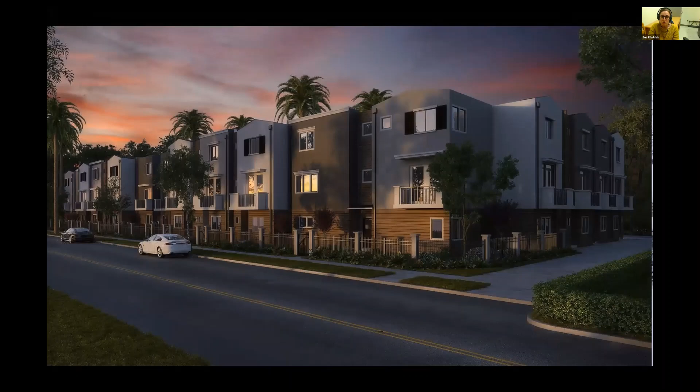So we also work on systems that provide safe forms of shelter. That could mean anything from a single family home to a multifamily residential unit, to things like high rises, office buildings, to educational facilities. It could mean universities, other school systems, even structures like stadiums. Places where we work on providing safe forms of shelter for where we live, where we work, where we play, and more.

We also work on systems that protect our coastlines and waterways. We are looking at our coastlines and trying to protect them from erosion. We're also trying to protect our natural waterways, so rivers, streams, lakes. And we also work on and create human-made waterway systems, like this canal system down in Indianapolis.

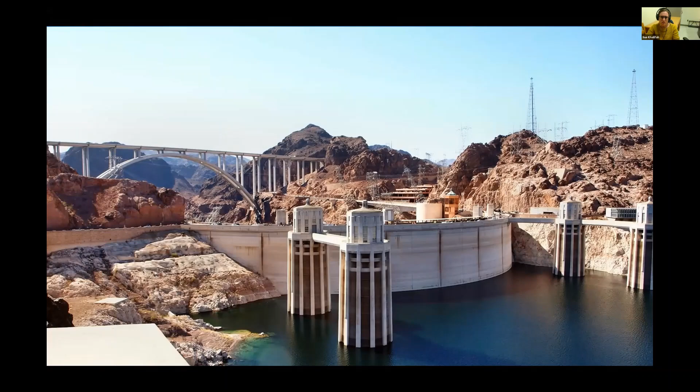And there's more. We also work on systems that supply cleaner forms of energy, things like solar farms, very common for civil engineers to work on, wind farms, hydroelectric plants, in addition to geothermal systems, using the ground as an insulator.

And we also work on systems, like Whitney was talking about, that provide clean water and sanitation. So when you turn on the faucet and clean water comes out, that's thanks to a civil engineer. And then that water goes down your drain and out, and it comes to a place where we take care of it and treat it.

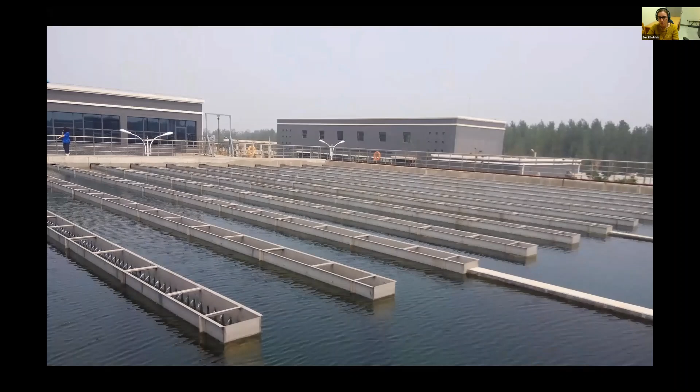So this is hopefully a high level view of some images that give you an idea of what we as civil engineers do. And now I'm going to transition into what civil engineering means at Purdue.

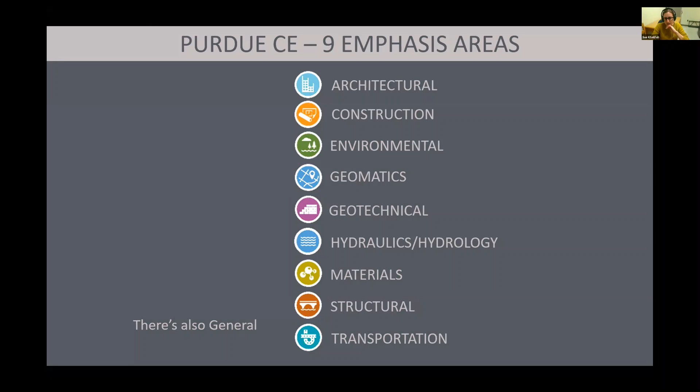We talked about civil being really broad and diverse, and you can see that here. In our program we have 9 emphasis areas, and we'll talk about all of those. But if you can't or choose not to decide on any one in particular, you can remain general, learning a bunch of different topics. So I'm going to now let everyone talk about the different emphasis areas here.

Jasmine, go ahead on architectural. Yeah, so the architectural emphasis focuses on energy efficient and sustainable built environments while optimizing human comfort. This deals with everything inside the building envelope, which includes the mechanical, HVAC, electrical, and lighting systems, as well as the indoor air quality and environment.

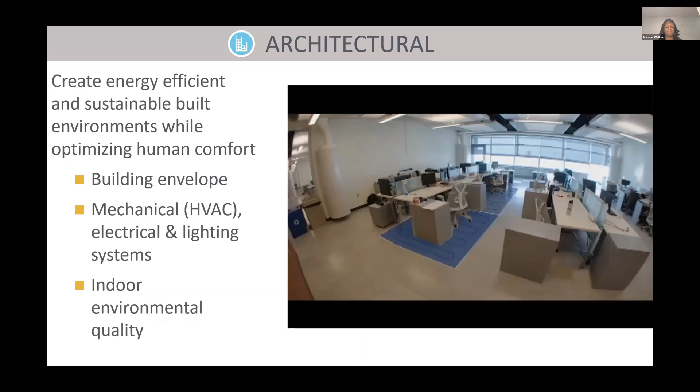Cal, tell us a little bit about construction. Yeah, so construction is a lot more about the implementation of the actual design. Pretty much you get your signed and sealed drawings at the end of the day, and then the age-old question is how we're going to build this, and how we're going to build it as effectively and cost efficiently as possible. The entire time, you've got to make sure you're following environmental standards, safety protocols, all that kind of stuff, and making sure you're not going completely over budget. So construction is kind of going from point A to point B, which is never really as easy as it seems. All the things here are things you'll be doing: ensuring quality, and all that kind of stuff.

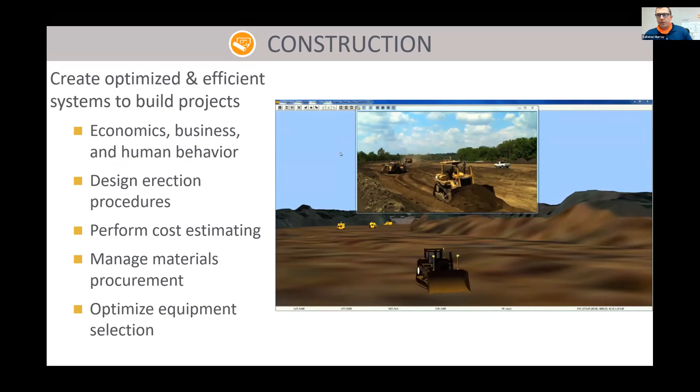Great, thanks Cal. Whitney, can you shed some light on what environmental means in civil engineering? So environmental for civils is kind of like the cross between what an environmental engineer would do if they were purely environmental and what a civil engineer would do. Basically, they're in charge of making sure designs meet the standards of whatever agency you're following, so in the United States that would be the EPA. Additionally, they're in charge of creating designs that better our environment in general or are sustainable, so they'll work with water, air, and soils to make sure everything is good for the environment.

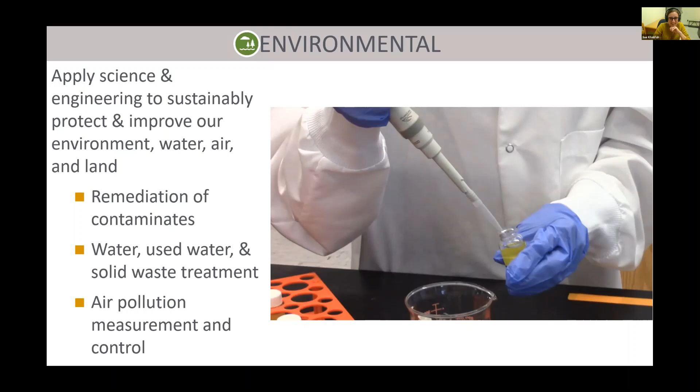So we're going to break it up now. Anthony, why'd you choose civil engineering and what do you love about it?

So from a young age, I was really interested in buildings, architecture, as well as airports and airplanes. This is from since I was in third grade. I always knew I wanted to do something with design and buildings. So when I first entered Purdue, I was actually stuck between deciding between civil engineering and aerospace.

My first instance of realizing I wanted to specifically focus on civil is actually Industrial Roundtable. I went as a freshman and talked to a couple of companies under the assumption that I wanted to go aerospace, and I was very overwhelmed by all the big companies, all the long lines for aerospace and how competitive it was. So in the back of my mind, I was like, well, I still love buildings very much, so I'm gonna go try to look for civil classes, and that's kind of how I was able to enter civil. It was the best decision I've ever made because I love just learning everything about structures and buildings.

And then I learned eventually later down the line that I can marry both of my interests with airplanes and buildings by working on airports. So aviation design, aviation engineering is something that I'm working on right now with my internship. I found that there's a lot of broad opportunities, a lot of great opportunities to pursue what you're really interested in within civil.

So Camille, can you tell us what geomatics means or what it is for civil engineers? Yes, so geomatics really is anything regarding landforms in a sense. Within geomatics, you design, develop, and operate systems to collect, analyze, and use the geospatial information about land, infrastructure, oceans, natural resources, and the environment.

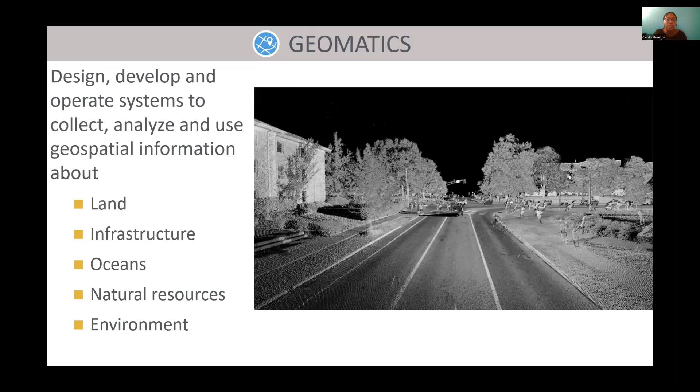Sorry, Jasmine, you want to tell us about geotechnical engineering? Yes, so geotechnical has anything to do with basically any part of the building that touches the ground. It's the analysis and design of foundations, slopes, retaining structures, and other systems that are made of or supported by soil or rock. So before construction even starts, you need to go test the soil to make sure that the strength is enough or compatible with the materials that you'll be using and the weight of the building.

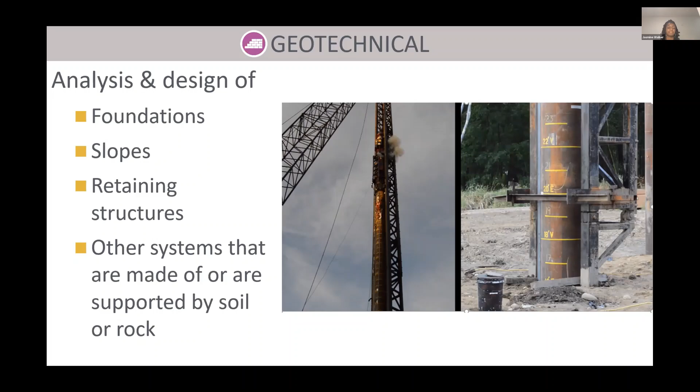All right, Whitney, you're up again. Yeah, so this one's my favorite. Hydraulics and hydrology, it's basically everything having to do with water. There's 3 different types of water systems. You have drinking water, taking water supplies and creating them into a drinkable, potable system. And then you also have rainwater and stormwater, making sure that floods and big storm events are all controlled. And then you also have wastewater - what happens once everything goes down our drains, once those storms do happen, how do we get it back into our system to kind of be recycled? So that's basically everything that touches those 3 things are hydraulics and hydrology.

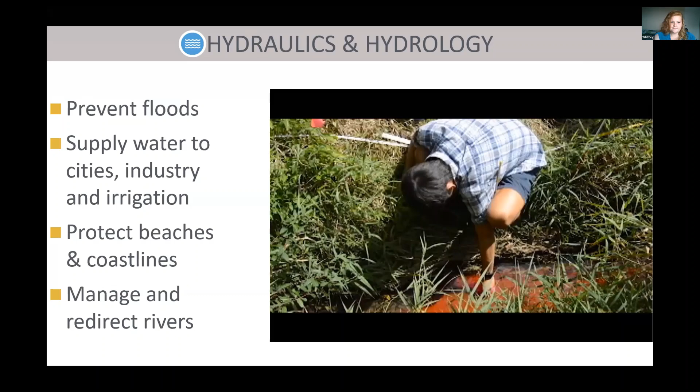Cool. Okay, Jasmine, you're back up. Why did you choose civil engineering and what do you love about it?

Yes, so I chose civil engineering because from a young age, I've always loved to play with Legos, and I'd always build these big skyscrapers, but I didn't want anybody to touch them. Even if you needed the Lego piece, I didn't want you to mess up my skyscraper. I also took a lot of trips out of the country, so I got to see different architectures from different times, like the 1500s, 1600s, and it just kind of made me fall more in love with architecture. But I also love the engineering side of things, so that's where I kind of married the two with architectural engineering. And what I love about it is how diverse civil engineering gets to be.

So last summer, which I'll talk about later, I actually had to do different things that I've learned. It's so broad and diverse. I get to jump around in different things, still under the umbrella of civil engineering.

Okay, great. Anthony, you want to shed some light on what materials is in civil?

Yeah, so within the School of Civil Engineering, materials engineering uses engineering and science to improve the current materials and create new ones. There's a lot of materials that goes into construction and civil, so that includes masonry, asphalt, bituminous materials, concrete, and more. This is a little bit different from materials engineering the major, which is a separate school, because within the School of Civil Engineering, the materials engineering concentration focuses on construction materials. So these are kind of the things that you'd be working on, different types of concrete strengths and testing of that. There's a lot of labs within the civil department that you get to do hands-on lab experiments in terms of materials.

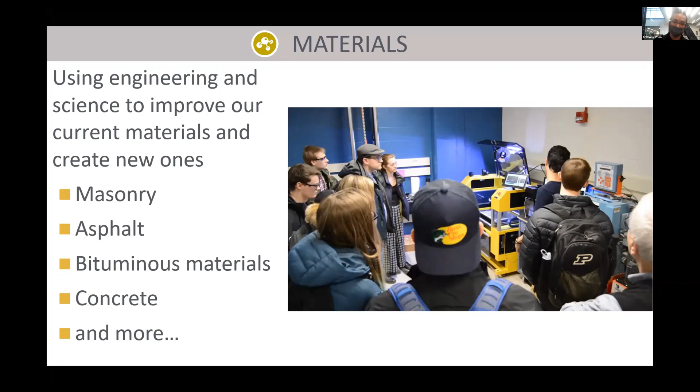Great, thanks. Caitlin, you're up, structures.

So structures, or the emphasis within civil engineering that is structures, deals with creating structures that are both safe, stable, and also comfortable and feel safe for the users that are going to be using them. And that can be anything from buildings to bridges to exit ramps to retaining walls. There's all sorts of different structures we encounter day to day.

The really neat thing I've learned about structures is that it can be implemented in any part of the design process. Obviously the initial design of a structure is an area a lot of structural engineers deal with, but they can also be really involved with the construction side, where they have to make sure the building or structure is going to be stable throughout all parts of the construction process, because you can't start building something and then have it fall down in the midst of trying to build it.

They also can be involved with fall protection within the construction side of engineering, which I've learned a little bit about with the company I'm about to work with. One of the positions they have is traveling around to different construction sites and developing fall protection that is structurally safe and sound for the construction workers while they're working on different parts of the project.

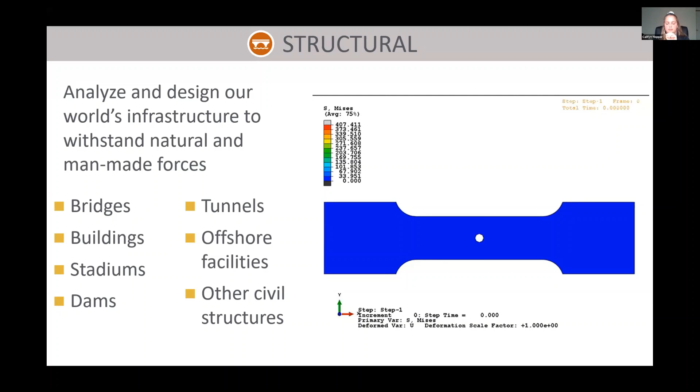Okay, Anthony, why don't you round it out with transportation? All right, so with the transportation concentration, this specific field focuses on ensuring the safe and efficient movement of people and goods. So this includes any type of transportation you can ever think of - road, railway, public mass transit, bus systems, light railways, trains, cars, planes, boats, oh my, all the above. A lot of what Purdue transportation engineering focuses on is infrastructure systems and highways, because we're living in Indiana and there's a lot of highways, and America is built on highway systems.

So you look at different traffic analyses, asphalt and concrete construction of roadways, but then there's also all these other different types of methods of transportation you can also focus on. As I mentioned specifically, I'm looking at aviation, but you can also look into public mass transit and other things I mentioned before. This one's a very broad one - a lot of different really cool stuff going on, a lot of different research and undergrad research opportunities here at Purdue.

Great, thanks. Okay, Camille, why did you choose civil, and what do you love about it? Okay, so I always knew that I really liked math and science, but I really didn't know what I could do with those interests. I was fortunate enough to attend a pre-engineering academy in high school for 3 years, where I was introduced to multiple different engineering types, ranging from aerospace, mechanical, computer, chemical, and then I had a civil engineering course, and that's where I instantly fell in love.

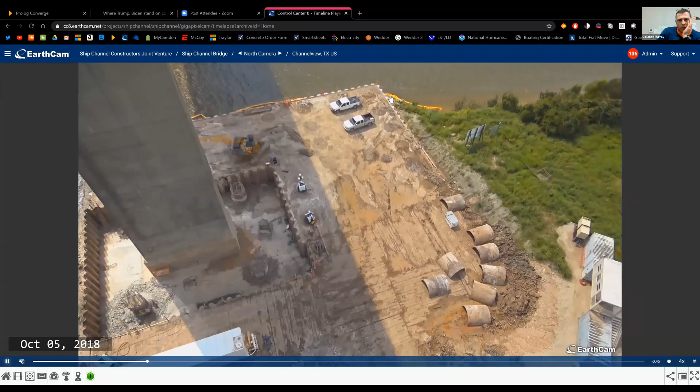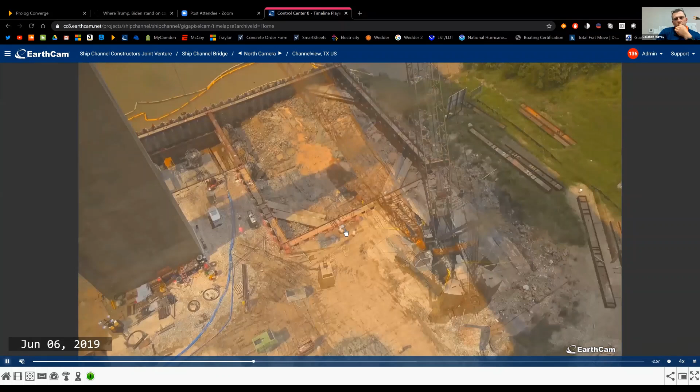What you're seeing right now is we're working on our deep foundation work. You can see we've started to have all these drilled shafts poking their heads out here. These are 10-foot diameter concrete shafts that go about 270 feet down into the earth. This cofferdam around it is pretty much to prevent the water and the earth from caving into it.

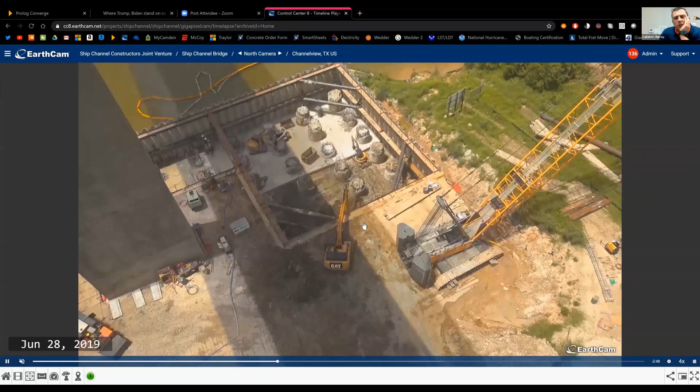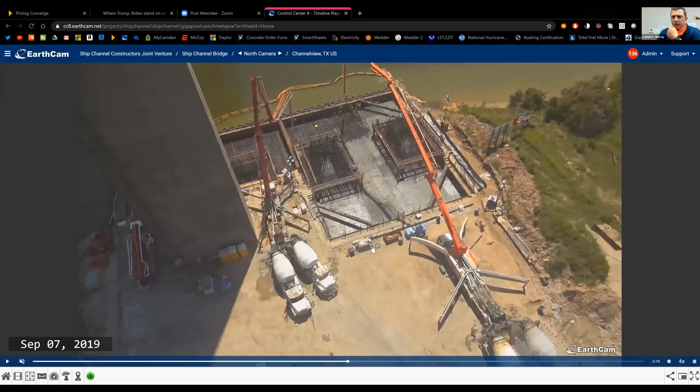You're going to start to see all the rebar popping up in here pretty soon. We poured these in two lifts. The first one was like 6,300 yards, which is a lot of concrete. And then the next one was about 5,000 yards.

Normally if you're pouring your driveway, that's maybe 6 or 7 yards of concrete, and this was north of 10,000. So it's just really cool what civil engineering allows you to work on.

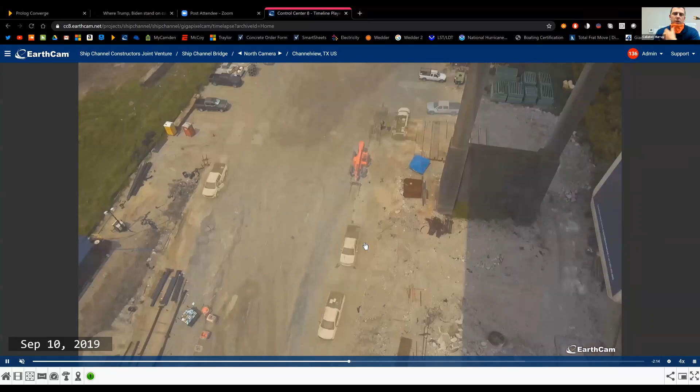Here you start to see the actual pylon take form, and the jump form system start to go up. I can stop sharing here because that's pretty much where the video ends. But that jump form system is going to go all the way up to the top there at 540 feet.

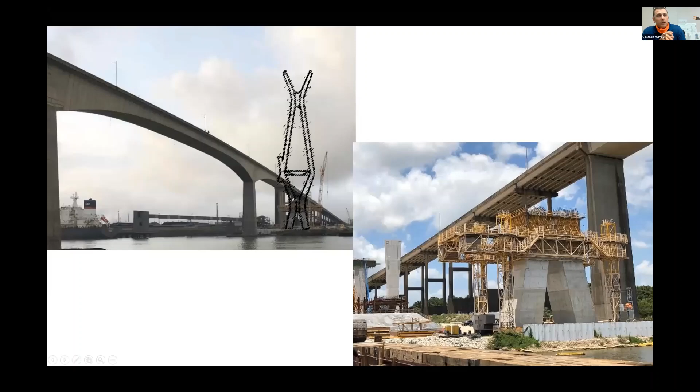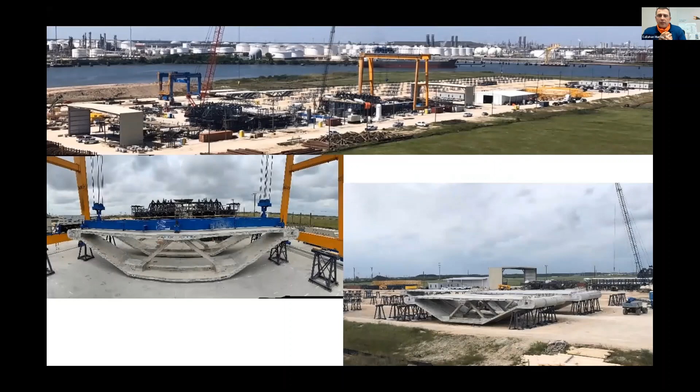What I liked about construction is, you're saying, oh, I'm going to build a bridge, but it's kind of hard to know what that entails. So we ended up putting a tower crane on the side, and we had to get coordination from the Federal Aviation Administration because it's going to be lofted at 675 feet up.

I mentioned this, we had a precast yard, so this is actually all on site as well. We're precasting these segments, and each of them weighs about 300,000 pounds. So we have these massive cranes, you can see the big yellow crane on top and the smaller but still massive blue crane up there.

Pretty much what that means is we lift those, float them out in the channel, and lift those into place. So you can go to the next one.

Some of the stuff I've had a lot of involvement with, which has been fun because my degree was in hydraulics and hydrology, was we were working on the trestle, which is pretty much how you get the cranes out over the water, and then you can drop the segments down in there.

You really use a lot of your degree, because just in driving the trestle, there's a lot of geotechnical calculations and geotechnical design you need to understand. Then there's obviously structures involved. There's environmental considerations too, because you have to make sure you're following the environmental regulations and all that kind of stuff. There's pretty much everything you learn that you're going to touch on at some point or another.

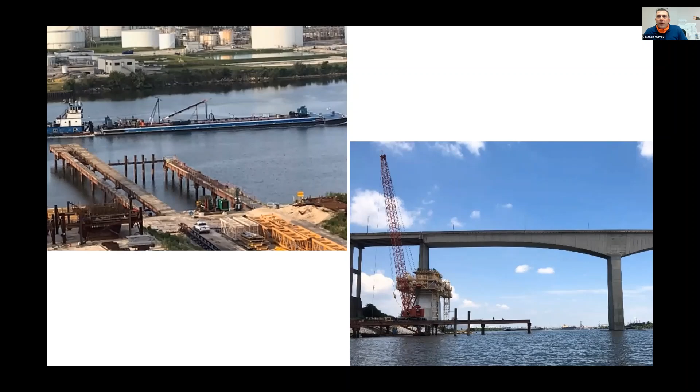This is another picture of the trestle. I was the main field engineer out here building this, and that's a year out of school.

Pretty much what Purdue teaches you, not even necessarily in the classroom but also outside of it, through working hard and whatnot, really prepares you to be able to go far. So I was the main field engineer, with just me, the superintendent, and the crews out there. At the end of the day, it was honestly just a lot of fun to be out there building that and stuff like that.

So I think that's all that I have for those slides.

If anyone has questions specifically about what using your degree out in the construction side of things looks like - you learn a lot of the design side of things in the classroom with the civil engineering degree. But if you're interested in being out in the field, you have to be able to post up in your truck and do some real quick calculations to make sure no one's going to be falling in the water and stuff like that.

It's absolutely something - I don't think you can see it in this picture on the left, but in order to be able to access the side of that, I quickly worked with our welding foreman to come up with a little overhang ladder, so the guys could just hop over the side and work there safely. It's quick little stuff like that - I don't know how to put numbers to this, but I can take a crack at this here and there and make sure things are going to be all right.

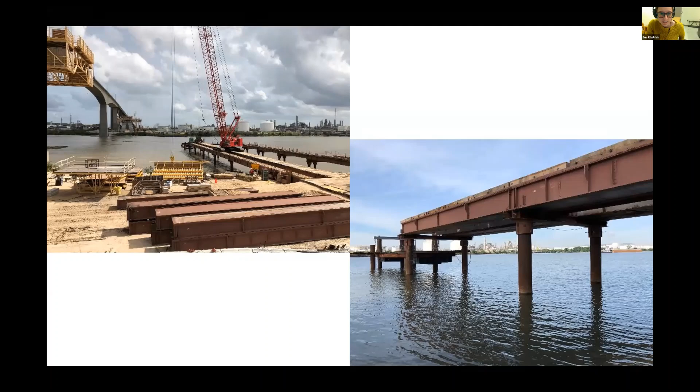So like I said earlier, I'm a structures emphasis. I'm a senior, I'm going to graduate this May, and I have the minor in building information modeling.

So one thing I would recommend is don't be afraid to apply for internships or opportunities that you feel you might not be capable of because you don't have prior knowledge to do it, because they will train you to do it. They know that you are an undergraduate student, a freshman or sophomore.

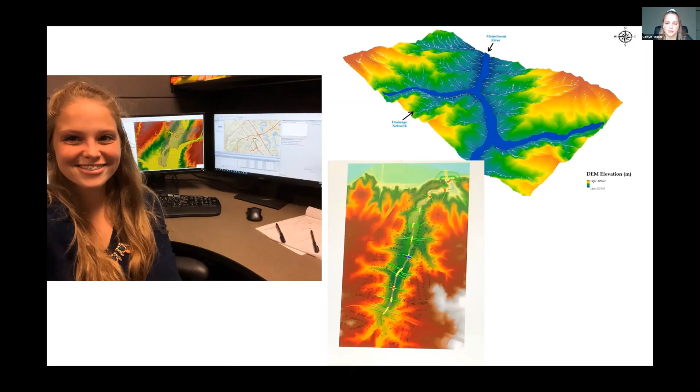I've also done plumbing models in buildings. We developed plans for all these buildings, whether it's an architectural plan, a plumbing plan, or an electrical plan, and we had to place each and every outlet where they're supposed to go.

This isn't required beyond CGT 164 for a civil engineering major, but I found it really helpful. A lot of employers I've talked to about getting this Revit minor have said it's helpful because a lot of companies are starting to move toward using Revit more than CAD, and a lot of current professionals don't have much professional training or experience with CAD or Revit. They've said having someone with that professional training would be helpful to bring into their company.

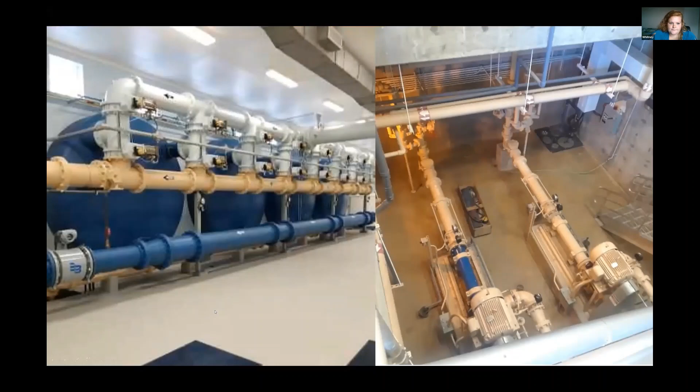Here's some pictures of a water treatment plant that I've been working on, that's in Frankfort, Indiana, pretty close to Lafayette. And then there might be some more.

That is an on-site generation facility, which is super cool. It basically takes salt, like table salt, and water, and shoves electricity into it and breaks up the salt molecules into chlorine and hydrogen from the water, and you can actually make bleach on site. So it's how you would make bleach to sanitize water in a normal way, but now you can do it on site at your treatment plant, and that cuts down a lot of the safety concerns with traveling with chlorine gas and bleach, which are both extremely flammable and very dangerous.

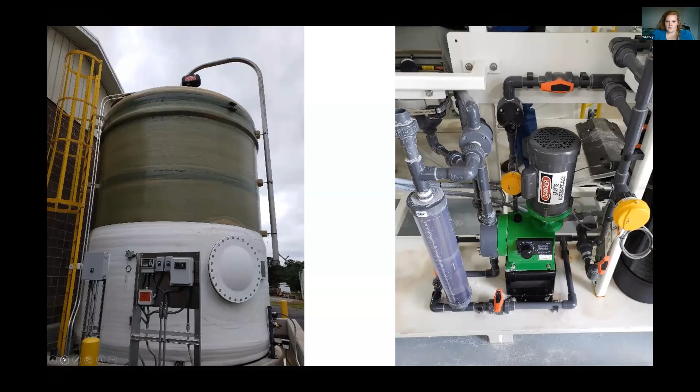And then those are just some other systems for pumping and stuff like that. Each one has its own nuances, but these are like my everyday things that I see.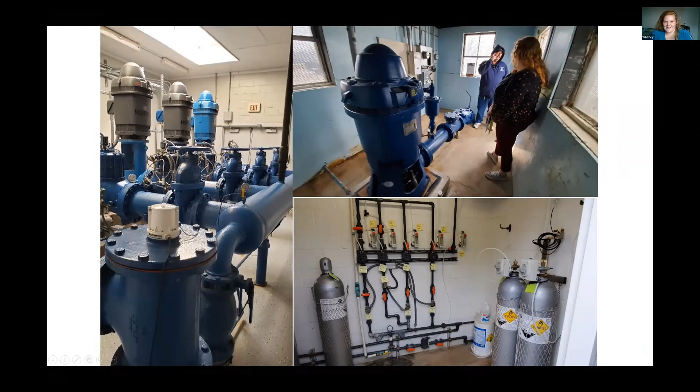So I forgot to mention earlier, but I do have 2 minors. One is in building information modeling, and the other is in sustainable engineering. You can go to the next slide.

Last summer, I was an intern at AECOM in Indianapolis. I was under their transportation department. I am an architectural engineer, so I know some of you guys in the comments were wondering how transferable these emphasis areas are. It is very transferable—the information that you're learning can be used across all civil engineering. So it's very nice that civil engineering is broad and diverse, but if you want more experience, you can get that experience in different ways.

Next summer, I actually just secured an internship with Bechtel as a project controls intern. That basically means I'll be doing the scheduling, cost estimations for the project, and making sure that the project stays on track. Post-graduation, I am looking to do a master's here at Purdue in architectural engineering.

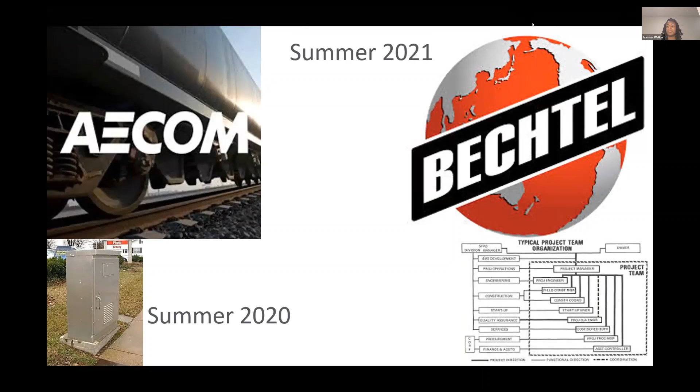With all that being said, I hope I answered all your questions, but yeah, so next slide.

That's awesome. So the 160th floor, what building are you in - are you in the Burj? Yeah, it's the Burj Khalifa. Yeah, that's so cool. It's one of the tallest - it is the current tallest building in the world. It's such an amazing structure, so much engineering and design in all aspects of it. Really, really cool. Wait, was it actually named after Sue Khalifa? It was not named after me. Well played, Cal. But I do share a namesake with it, so hopefully I'll get to visit at some point.

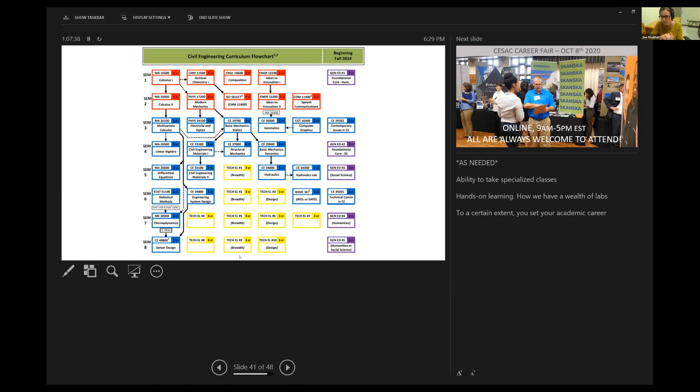In civil engineering, you get to do that because the breadth courses require you to take different pieces or aspects of civil engineering. Any one of those 9 areas, that's where you do it. You take an introductory course as your breadth course. It gives you a basis because, like I said, you're graduating as a civil engineer. My degree is this civil engineer degree. I specialized in designing buildings specifically, but my degree is fundamental so that when I got out, I was able to understand all the different aspects of civil engineering, because in the field they all tie together. There's so much overlap. So does that address your question?